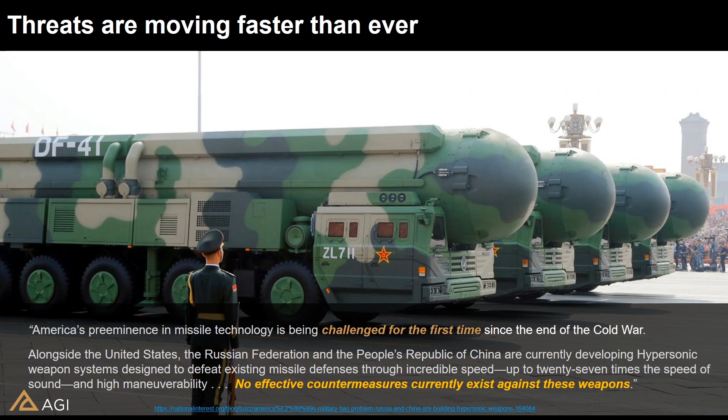We have to ensure that as new challenges arise, we are up to the task and that we do not get left behind. As the world continues to change and evolve, we have to understand that we need to go even faster than ever as well.

So we are seeing these new challenges and threats emerge, but we also have to talk about some of the challenges that we currently and have previously faced. Various studies across the industry have been conducted, and in particular, the Standish Group found that 82% of effort on software projects goes right into maintenance and testing.

Now this could be due to a number of reasons, such as having code that is stovepiped, one-off tools and software, or a piece of code that is repurposed for a use case entirely different than what it started out for. This has led some organizations to have mission-critical pieces of code that only a single individual knows how to run because they wrote it some 10-odd years ago.

Another issue is that a lot of programs or projects have initial requirements that don't fully capture the scope of the project, and changes had to have been made. I'm sure many of you are familiar with scope creep. Because of this, we aren't even getting a one-to-one increase in production when we get that increase in staff. Another study concluded that a 50% increase in staff is only leading to a 20% increase in production.

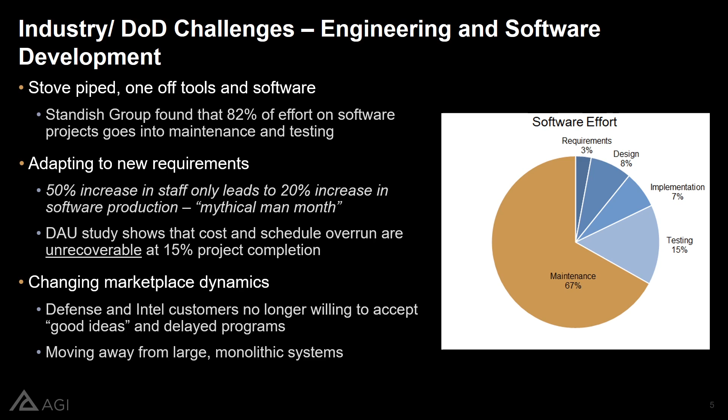Lastly, the marketplace is completely changing. Defense and intel customers aren't willing to accept good ideas if it costs a program delay to implement these ideas. Due to this, we all find ourselves at a very interesting time in our industry. However, we have and will always have new challenges to face, and like always, we will come up with a solution. But that raises the question of, what should a solution to these challenges look like?

Well, we've listened to what has been said across industry, and here's what we really came up with. A solution should include a limited set of open, highly capable tools that are tightly integrated across all phases of a program and even across different programs. This is important both for the continuity of highly interdependent programs, but also to minimize the ramp-up of personnel as they transition from program to program.

To that end, really, a solution must be open to custom data and leverage common data standards to integrate with tools like MBSE or even your proprietary models. This way, your engineers can focus on the secret sauce that makes your organizations unique, versus trying to maintain some old code or currently recreating a duplicate model that was already used for a different program or project, or etc.

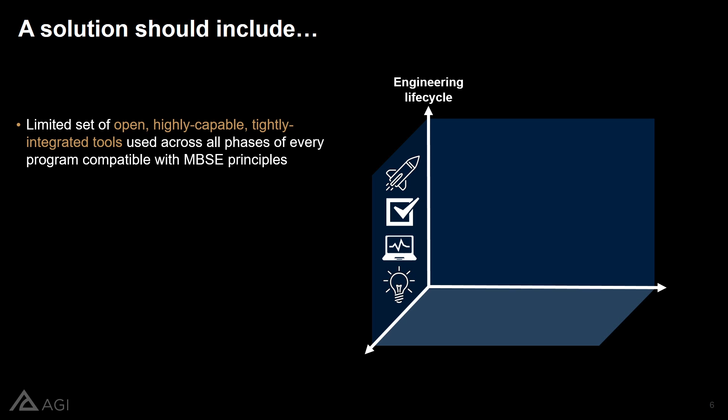Additionally, a solution should include a sophisticated analysis environment that can enable large-scale trade studies where design parameters can be evaluated against mission performance metrics from all levels of modeling. This can be at the system level, component level, and even campaign level of modeling.

Along with that, this analysis must rely on rapidly modeled, accurate dynamics of any platform performing the mission. It does not matter if it's modeling a friendly or adversarial entity, a spacecraft, an aircraft, or etc., using either simulated or even ingested real data.

And this is where collaboration becomes very, very critical. As your engineers, scientists, and specialists make changes in their own domain, those changes must seamlessly ripple through to the specialists in other domains, instead of having to schedule a meeting or email an individual on the other team informing them of the update and making sure they receive it in a timely manner.

For example, if your communications team makes a change to the antenna size, how does that change affect the link to the aircraft? Will this introduce more dropouts? These are the kinds of changes in parameters that you would want to seamlessly flow through your entire engineering lifecycle to see how, at the end of the day, that mission is impacted by your antenna change.

Finally, the whole solution must be validated and trusted across a wide variety of complex problems. This will help keep the focus on addressing new challenges and not building and accrediting new tools every time. Along with this, the solution must be well documented and supported so your engineers can learn and get up to speed without bogging down your own highly valued subject matter experts.

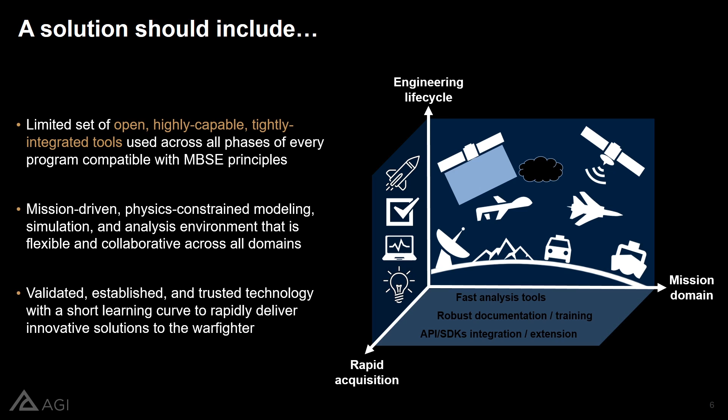So this basically brings us to the concept of digital mission engineering and even digital mission operations. Digital mission engineering is the use of computer-based modeling, simulation, and analysis tools to incorporate the operational environment and evaluate mission outcomes at every single phase of the engineering lifecycle. Not just in design, not just in testing, not just in operations.

When programs are created, they are meant to meet a need, a gap, a requirement that will help achieve the desired mission objective. Programs aren't necessarily created just to create the coolest new aircraft or the coolest new tracking system, just because we can, as cool as that is. There's an underlying purpose that guides every task, every assignment, and every decision, and it's the mission. It always comes down to evaluating the mission outcomes.

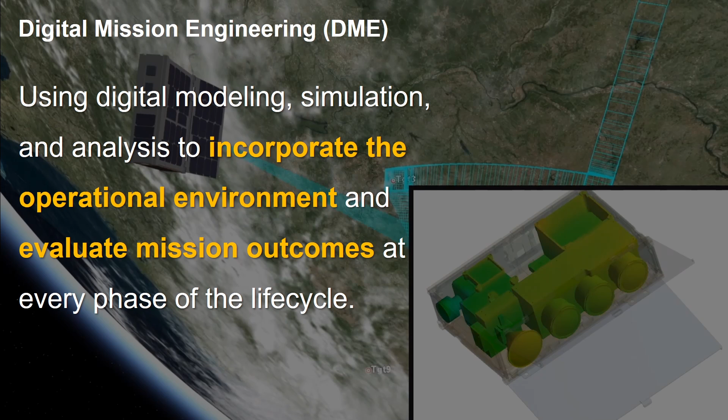So if we keep that in mind and take a bird's eye view of digital mission engineering, even though the mission is of utmost importance, DME is comprised of seamlessly integrating the mission models with the system models, subsystem models, and even component-level models into one physics-based construct. To really do this successfully at each level, we create what's known as a digital twin.

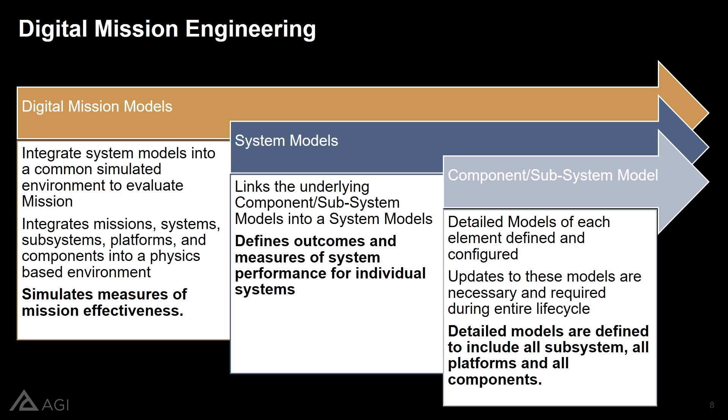A digital twin is a digital representation of our component, system, or even systems of systems. The purpose here is to really evaluate mission effectiveness while at the same time component effectiveness, all in a single user domain. Remember, it's about keeping this as seamless as possible.

So now to reframe the question of why now, or why DME is important now, based on everything we've talked about, there are really two big reasons. There isn't a tolerance anymore for lengthy program timelines, and the complexity level of these programs is increasing dramatically, which points back to an acceleration of national security threats. So these programs are not only having shorter timelines, but the complexity to achieve the results is so much more advanced.

We can't really have an incremental change here and there to update our current methodologies. We need to implement a revolutionary improvement approach. And it's not just us who think this way.

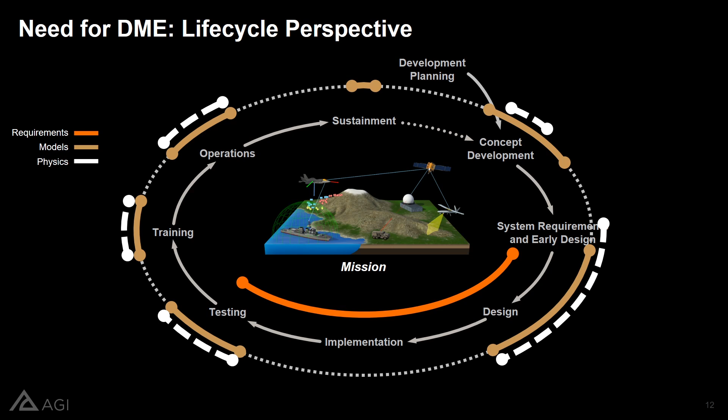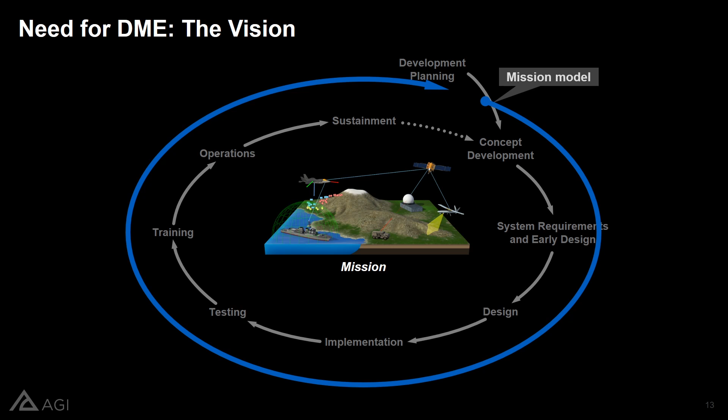What we have here is this vision to achieve better decisions sooner. Process changes and the right tools are important. What we see here in this vision is, unlike the previous life cycle, there aren't going to be any broken lines as we frequently see today. The goal is to maintain a persistent model from the concept through sustainment so that there is traceability back to the mission outcomes. Always about the mission, remember that.

And these models can be descriptive models, calculation analytical models, behavioral models, or really anything that we discussed in our definition of DME. The goal here is to have a persistent model that brings as much high-fidelity modeling and simulation as far forward, or to the left of the influence effectiveness curve, as possible.

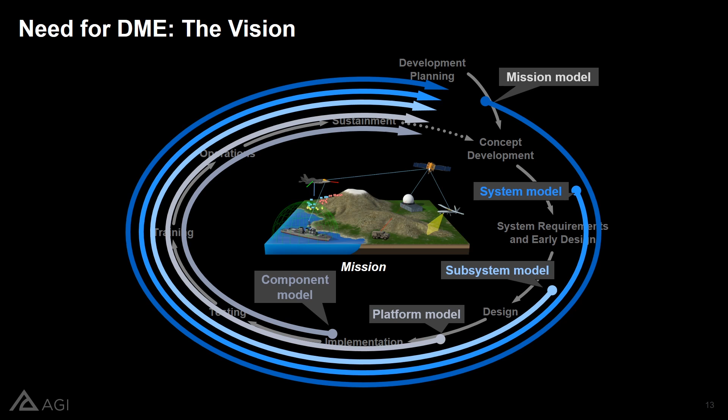So we need to make sure that all of these seamless models are always communicating and connected to that multi-domain physics environment to really achieve those physics outcomes. Having that multi-domain physics environment or ecosystem is very important to ensure that it will help us really knit through the fabric of the digital thread through the life cycle.

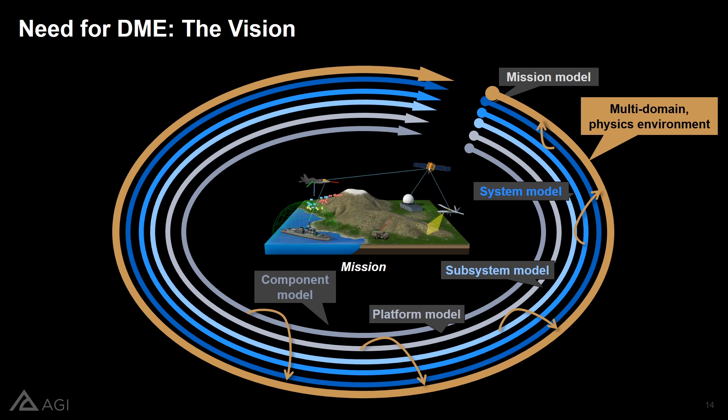So far, at this point, what we've discussed is an overview of DME and why it's very important right now. And now, for a moment, I really want to move on and show you what our vision of DME looks like and how AGI and STK really fit in and play a fundamental role in all of that as well.

So as we jump into the Hypersonic example, you will notice that almost every stage is constructed or has a piece that is analyzed using STK. So before we really jump in, it makes sense to provide some context for what STK really is.

Many folks know us for satellite visualization, but AGI STK is much, much more than that. We are a multi-domain type of tool that can analyze all land, sea, air, and space platforms, as well as subsystems going from EOIR sensors, communications and radar platforms, propulsion systems, etc.

And more impactfully, we fuse all of these disparate or various elements into a single common environment that's physics-based, where we can analyze the interactions that are taking place between the component level models, the subsystem level models, and system of systems level models. Using STK, we also can extract over 40,000 performance metrics to ensure that you are getting exactly the information and data you need to ensure mission success.

Along with that, we know that a lot of folks, like we were saying before, have their own secret sauce, and STK has flexible form factors and APIs to really allow you to bring in your own data-driven custom models that we can then use to integrate with the current models that are built within STK.

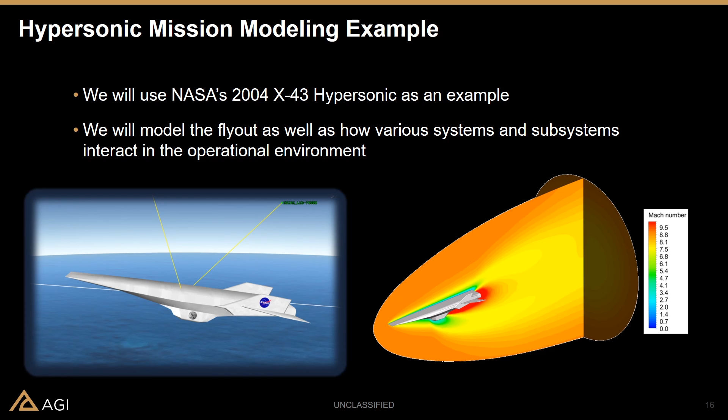All right, so now we're just going to jump into the hypersonic mission modeling example with everything that we've established about STK and digital mission engineering. For our example, we will use NASA's 2004 X-43 hypersonic glider flight. And with this, we will model the flyout as well as how the various systems and subsystems will interact with the X-43 in the operational environment.

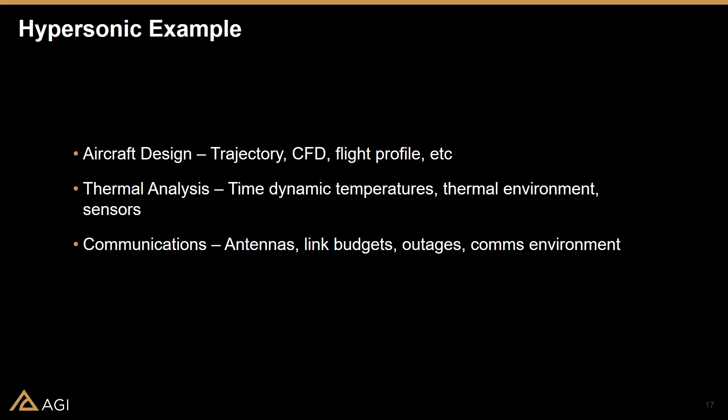So, just to highlight what was in the agenda, we're going to break this up into 3 portions: the aircraft design, the thermal analysis, and the communications. Now, of course, this may not encompass every part of the hypersonic engineering lifecycle, but for our time here today, we felt that this will be good enough to really get a better understanding of how digital mission engineering can raise the efficiency and effectiveness of your engineering analyses. So, we're going to start off first with aircraft design and really focus on the trajectory, CFD, flight profile portion of it.

So going into the flight capabilities, with STK Aviator we have the ability to define realistic models and performance characteristics for highly accurate time-based aircraft route analysis. Within the module, the user can define the aircraft model, the performance model, and flight sites, as well as procedures to fully outline the aircraft's mission. In that aircraft model, we can define the physical characteristics of the aircraft, as well as the modes of flight that define how the aircraft flies in any given situation. Not every single maneuver will have the same type of control surfaces deployed, etc., and all of that can be taken into account.

Performance models are used to define the behavior of this aircraft, so by specifying the performance in every phase of the mission, we can change the manner in which the aircraft is performing the mission based on the priorities of the mission. This can include modeling the takeoff, climbing, cruising, acceleration, descent, and landing, with parameters such as the bank angle, turn radius, roll rate, as well as various aerodynamics and propulsion of the aircraft. We also can model the fuel and the fuel distribution and some of the operational environment, because a flight won't always be in smooth, calm air. You can model wind effects to see how your fuel consumption and other parameters are being impacted.

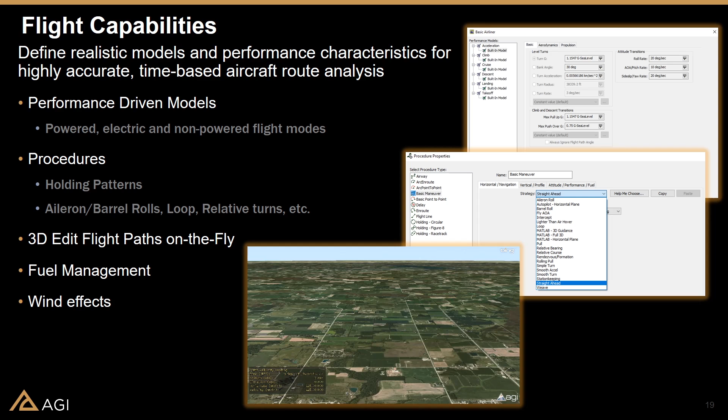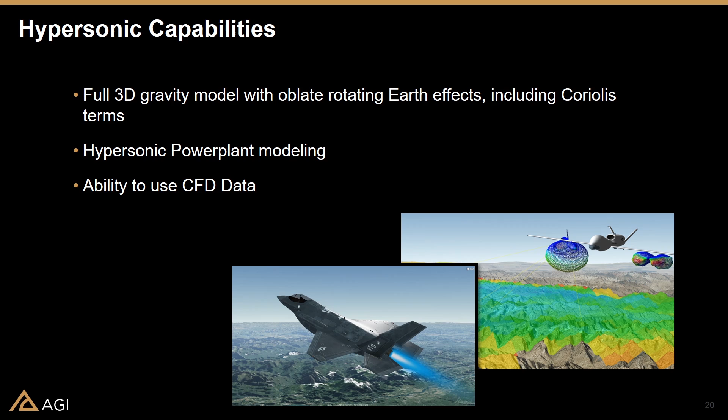Along with that, at a very high level, we also have hypersonic capabilities right within Aviator. Aviator has a full 3D gravity model with oblate rotating Earth effects, including some Coriolis terms, and we also give the ability to model some hypersonic power plants. Aviator can also ingest CFD data to ensure that your aircraft models are even more accurate than what the tool can predict, especially with these new hypersonic vehicles being tested in CFD environments or even wind tunnels. From these, you can generate a flight envelope that gives a realistic representation of how your aircraft will perform under various conditions.

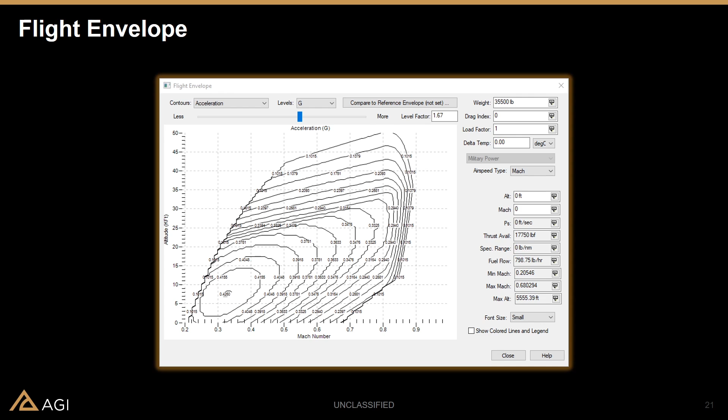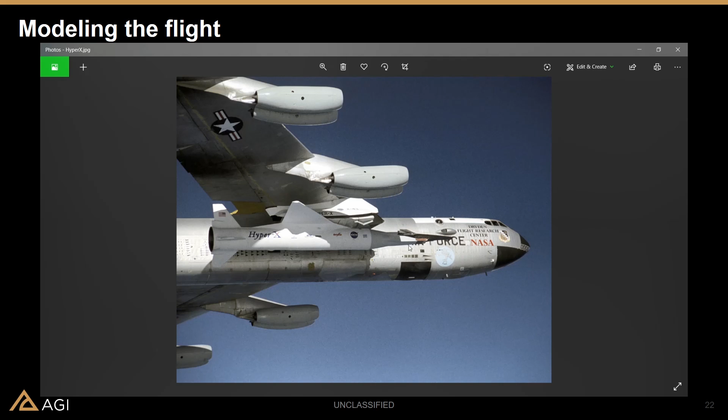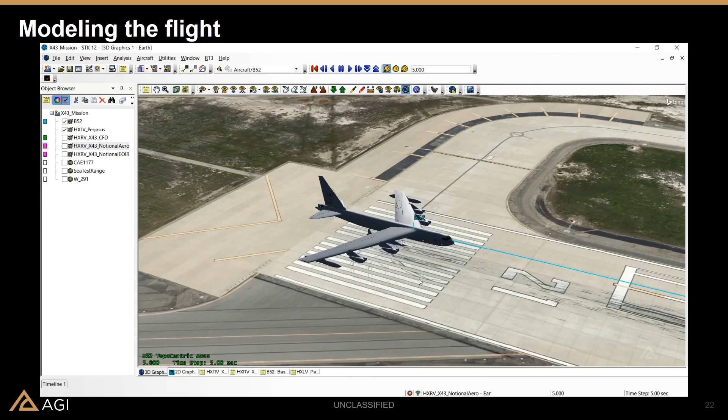So with all of this in mind, with STK Aviator, from both the hypersonic side and the fixed-wing aircraft side, we were able to model the X-43 hypersonic vehicle's flight within STK, and in particular the entire system of systems of aircraft used for the X-43 flight. As you can see, we're about to take off from a runway in STK, and here we have an image of the B-52 that actually flew on the flight for the X-43. On the B-52, we have a Pegasus Stage 1 launch vehicle, renamed the HyperX launch vehicle, on the wing with an adapter, and the HyperX research vehicle, or X-43, on the nose. Within STK, we modeled all three: the B-52, the Pegasus launch vehicle, and the X-43 research vehicle, the actual hypersonic portion.

Here you can see it taking off from a runway, with our B-52 following a certain trajectory that we modeled. Luckily with Aviator, we don't have to explicitly write out every independent waypoint; we can model the B-52 in terms of simple procedures, such as taking off, flying to a waypoint, flying straight for a certain amount of time or distance, and then turning around to land.

Within this flight, we have the Pegasus launcher and the X-43 deploying and flying off. So here we can already see how the operational environment is allowing us to really combine these three systems together and see how they interact with one another in terms of when one has to deploy from the other and so forth. As well as that, you can see that with Aviator, we were able to take metrics of the B-52 that we got from various papers and model it right within the software.

So along with that, we can see here that after a certain amount of time that the B-52 flies, we were also able to model the launch vehicle that takes the X-43 up to altitude where it can go through its hypersonic gliding. And that's in this yellow line that we see on the screen here. So we can tell that for some moment in time, it is attached to the B-52 under its right wing, and then after a certain amount of time, it will then get deployed and launched off to get to a certain altitude of about 100,000 feet and a Mach of about Mach 10 for the hypersonic glider to deploy and go through its analysis.

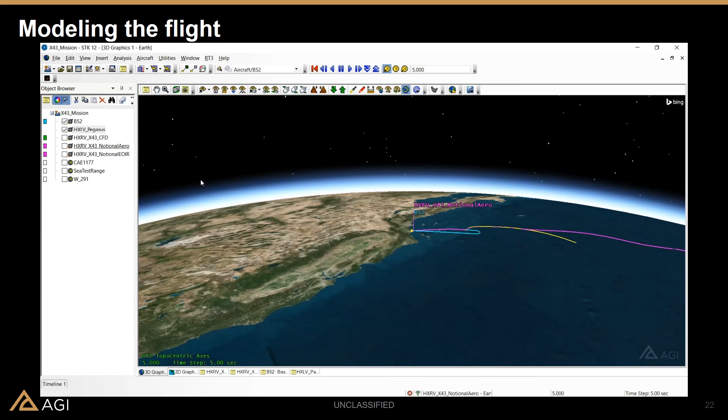But before it does that, we have here in magenta the X-43 that was able to be deployed. So as you can see here, working within the STK operational environment, we're able to show all three take off, and we're also able to show this X-43 deploying and get certain metrics from it.

If we were to take a look at the X-43 here, you could see that really due to just the nature and the time that this test took place, the hypersonic portion here is only for about 10 to 11 seconds. And the reason for that is this is technically a hypersonic glider, meaning it can't really achieve that hypersonic speed, but it can maintain it with the fuel it has on board. So before this hypersonic phase, it ejects from the Pegasus, which brought it to speed, and now here we're observing how the hypersonic vehicle behaves with the fuel it has on board and the metrics that we were able to ingest into the software.

If you can look at the top left, you'll see that the initial aircraft setup is X-43 notional, meaning that we took data that we got from public NASA papers about the X-43 and ingested that into the Aviator, which was able to make a flight profile based on those metrics. This is what led us to get the flight trajectory that we do, and also points out why the aircraft lands where it does in terms of the physics that are being calculated.

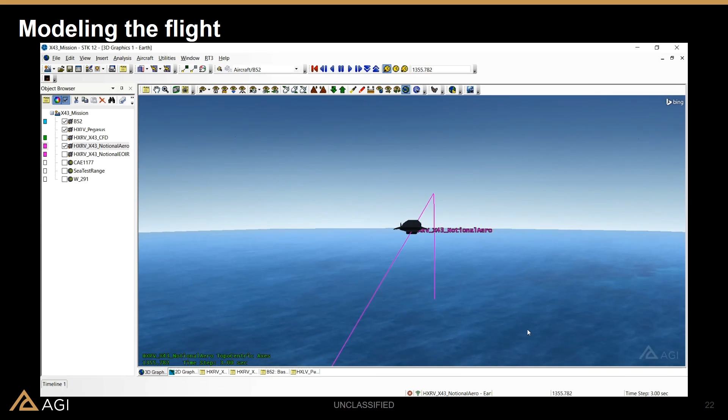And here we can see we have the X-43 just after it's deployed going along its route, and you can see here it has about a 10-degree angle of attack, and we're just going to let it propagate. One thing to note is we're going to see this go through a physical motion as it's trying to maintain its angle of attack, known as a phugoid motion, as you can see it kind of going up and down. And we did not tell the aircraft to necessarily do this. We told it to maintain an angle of attack, and it essentially is now using the physics built into STK to accurately model a phugoid motion.

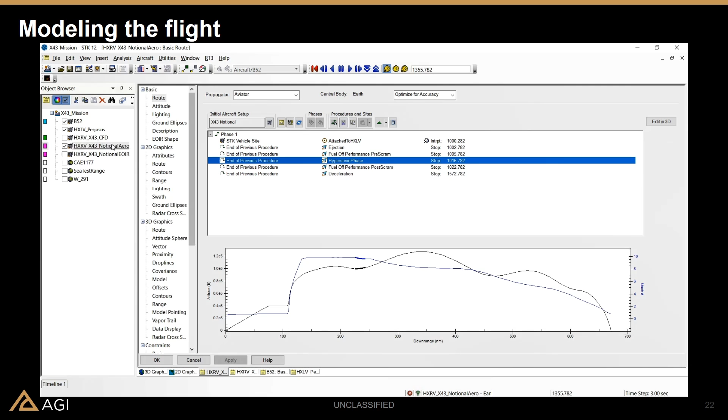And here you can see that now this X-43 is landing somewhere in the ocean. And the whole mission use case here is the engineers and analysts want to model how well this hypersonic vehicle can be detected and a general idea of where it lands for recovery. Of course, if you are familiar with the real story, I don't believe recovery occurred in all the flights, and we may have lost some just due to them hitting the ocean.

But anyways, with this X-43 notional aircraft here, you can see that we have some of the varying metrics to get from the software. We did mention that there's over 40,000 metrics, but here is just a few of them that are dealing with flight profile by time of the hypersonic vehicle.

And here you can see that we're able to get metrics such as downrange, vertical speed, altitude, fuel consumed, and so forth. And of course, right at the start of the mission, the X-43 is pretty much on the launch vehicle, so the fuel isn't consumed, but as we go forward, we can see it is. So here we have just a general modeling of the hypersonic aircraft trajectory portion only.

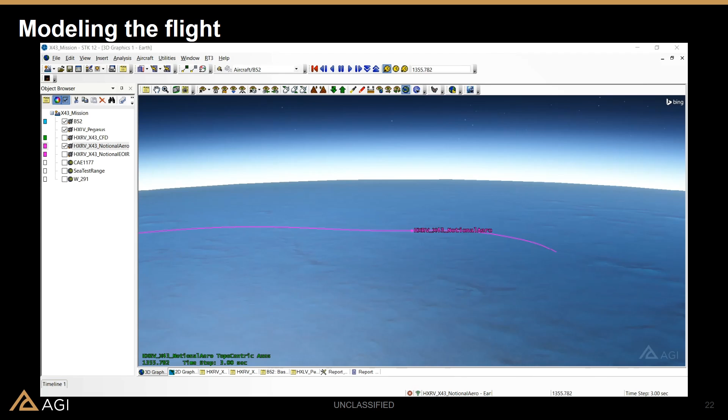And one thing to note is with STK, we can up the fidelity as well. I did mention with Aviator that you can use CFD data to once again increase the fidelity. Unfortunately, we didn't really have the most accurate metrics that we got from the NASA papers about the lift and drag coefficients, so that is why this HyperX launch vehicle is known as the notional aero. But what we did do is with another tool that is very, very helpful for digital mission engineering is we used ANSYS's Fluent tool for CFD modeling.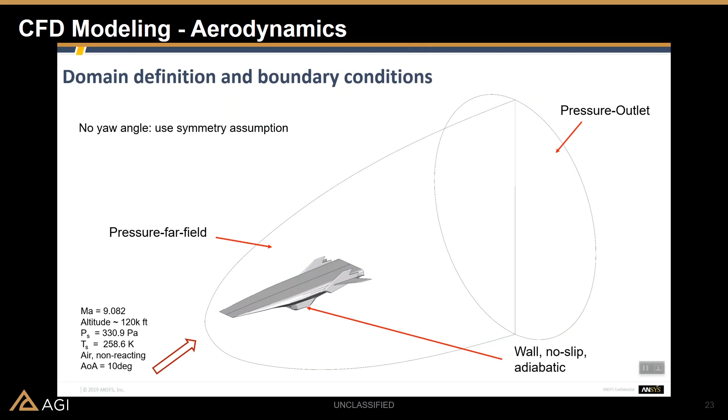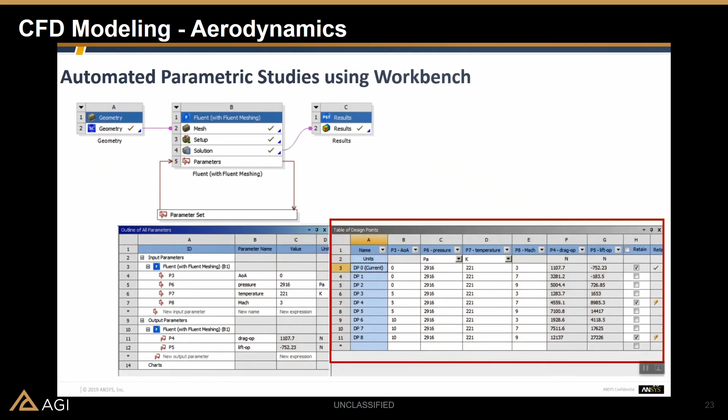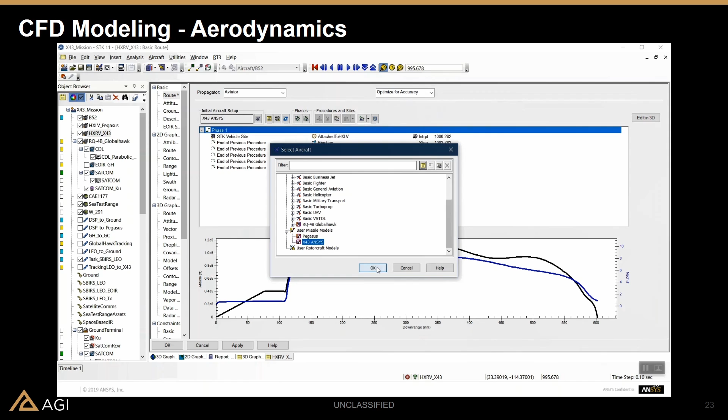And what we did is we placed in the hypersonic vehicle to get a more accurate representation at various speeds, altitudes, and angles of attack to get a more accurate representation of lift coefficient and drag coefficients. From this, we were able to import some of this data right into STK to give a better idea of how exactly this aircraft should behave versus the notional assumptions that we got from using the information of its geometry and power plants from the NASA papers.

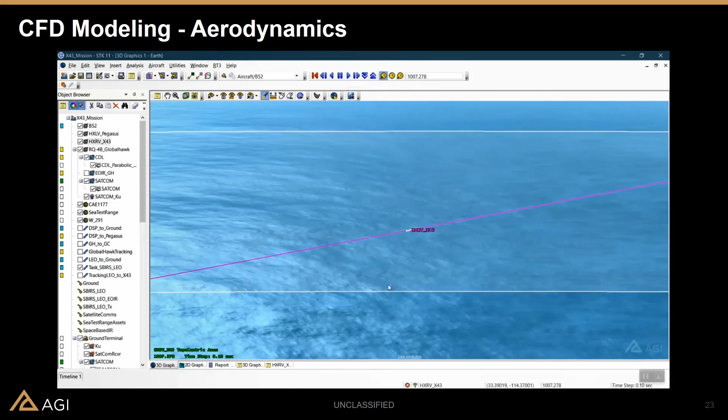So here we have a little bit more of a higher fidelity analyses that's going into the X-43's trajectory and flight profile, as we got it from a high fidelity component level analyses done through ANSYS with CFD. And just to kind of go forward here and show you the difference between the two, currently here we're back in our environment where we saw we had our hypersonic vehicle. We just hid the visuals of the B-52 and the Pegasus launch vehicle. But what we're going to do is compare the trajectories between the CFD version of the X-43 versus the notional that we got from the generic or the generalized papers.

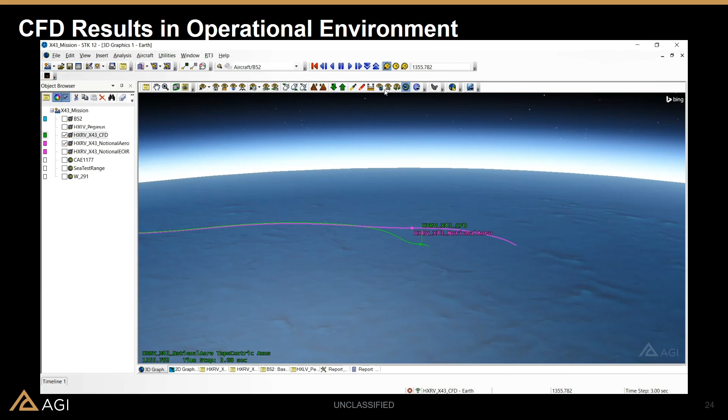And here we can see that we told the CFD aircraft here to follow the exact same procedures in terms of deploying at the same time and so forth. But just due to the higher fidelity of metrics, we're able to see a disparity or a generally large difference between where the two vehicles say that they are landing. Now, in our use case, this could become very important in where some boats have to be placed in order to recover this vehicle. It's about a 92-kilometer difference. So we have to make sure that we are placing entities in that area or entities to track this in that area so that we ensure success in recovery and also success in testing various subsystems or systems that we need to test.

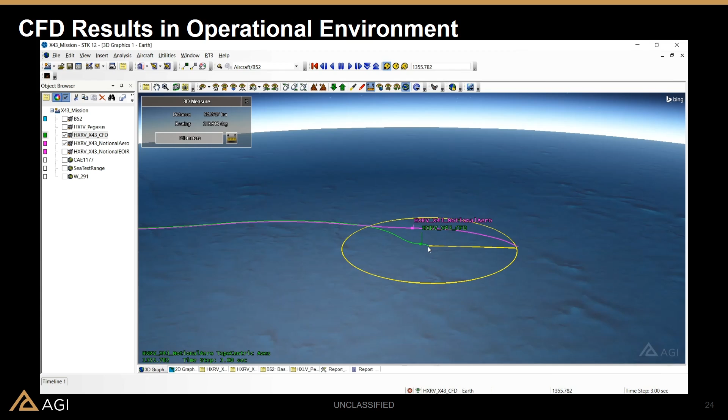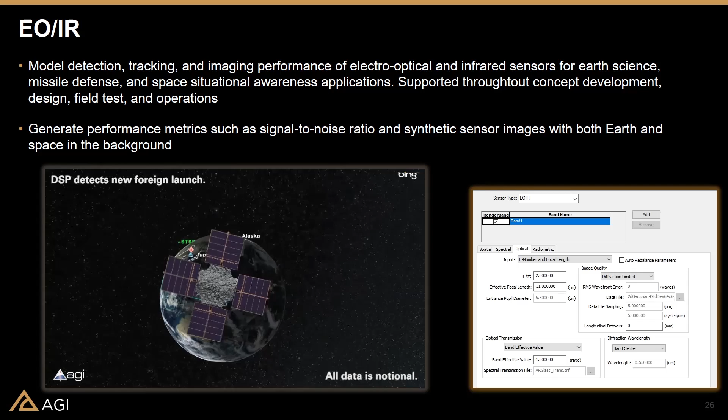So now we're going to move on and start talking about the thermal analyses. This includes things such as time dynamic temperatures, thermal environment, and the different sensors that we have to model in order to properly make sure that we can detect our hypersonic vehicle just based on its thermal signatures. For this, we will be using EOIR, still out of STK. What EOIR allows us to do is model detection, tracking, and imaging performance of EOIR or electro-optical and infrared sensors for various different applications, such as earth science, missile defense, and space situational awareness applications. So this is pretty much supported through the whole concept development, design, field test, and operations.

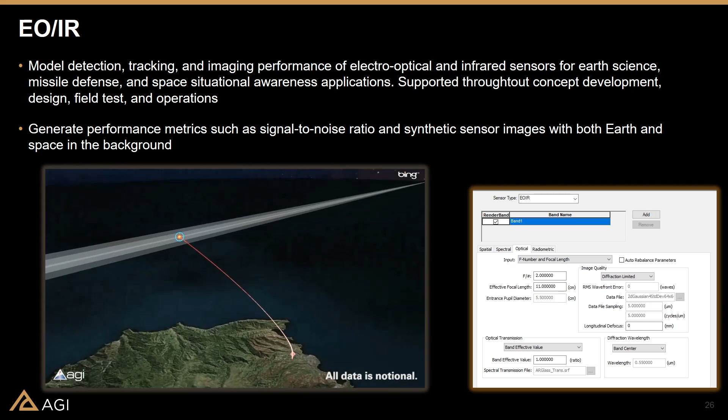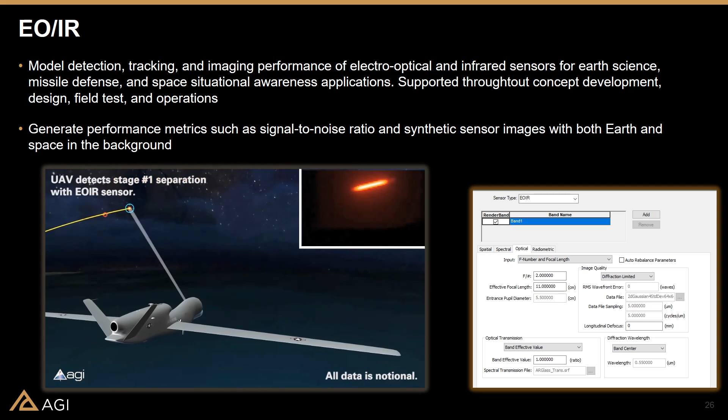And with EOIR, you have the ability to generate some technical metrics, such as signal-to-noise ratio, but not just data in the form of reports. You can also generate synthetic scenes or synthetic sensor images that a realistic EOIR platform would be generating. But it's all simulated, so you still can go through your parametric analyses, but still generate lots and lots of synthetic scenes and data to really make sure that you are getting the proper results.

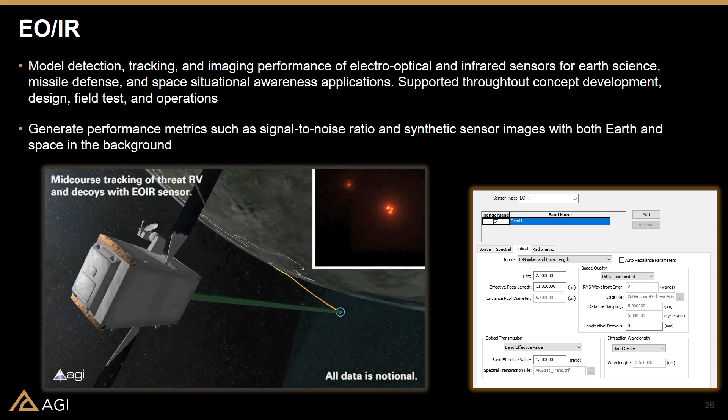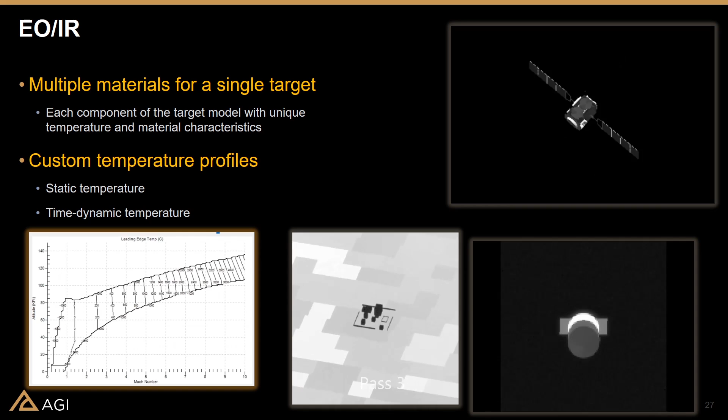So with EOIR, you're not necessarily just going to be looking at a static temperature, especially with hypersonic vehicles. A certain region, like the leading edge of a hypersonic vehicle, may have its temperature change drastically over time. So EOIR gives you the ability to really model those proper types of temperature disparities that occur over time in the software to once again really let you take a look at that whole mission level of performance characteristics.

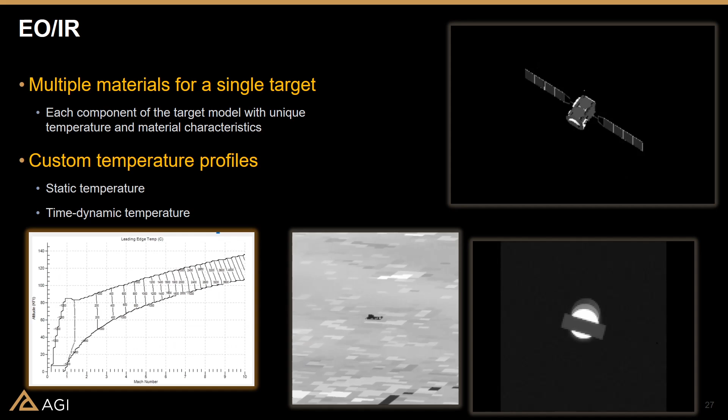Yes, we know that our sensor can see the vehicle at its hottest, but depending on where our certain sensors are placed, are we able to even detect the vehicle when it is flying at its lowest temperature? If not, can we still detect the vehicle, right? These are the kinds of questions that we're hoping to answer.

But along with that, there is more to the operational environment. You may not have clear sunny weather every single day. In our hypersonic case, it may not be a completely clear day either. There may be some clouds in the way or so forth. But luckily, with EOIR, we have the ability to ingest cloud modeling with a thin layer approach, as well as supporting inputs for different time dynamic layers and cloud characteristics that go through percent cloud cover, the temperature, emissivity, and radiance. Remember, we always are focused on the mission, and random bursts of bad weather are part of the operational environment.

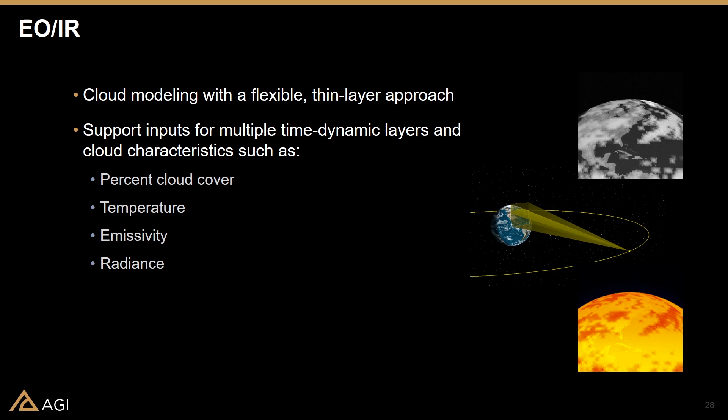So just going back to our example with STK and really taking a look at that thermal environment, we're seeing here a representation of the hypersonic flight, but with more entities added in. You can almost picture that the folks in charge of the aircraft now passed it off to the thermal group, who had some information about where certain satellite platforms and other aircraft platforms should go that would be containing some of these EOIR sensors.

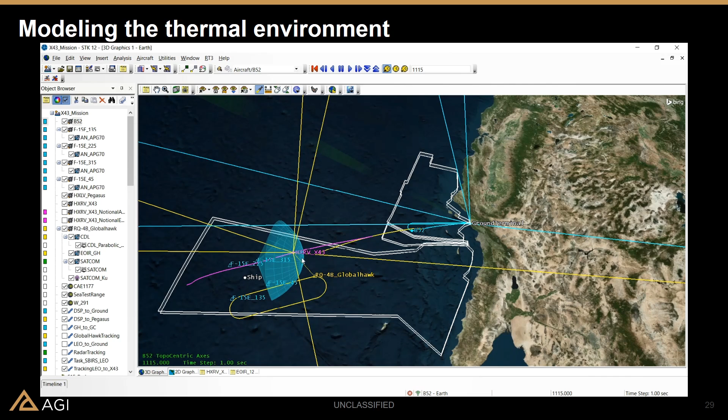So for example, we still can see our initial route here with that blue B-52, the yellow Pegasus, and then the magenta HyperX research vehicle. But around it, we can see that we have a whole bunch of various entities, such as some F-15Es, an RQ-4B Global Hawk, as well as a bunch of UAVs. They're all communicating to a ground terminal, but they're also doing observations of the hypersonic vehicle.

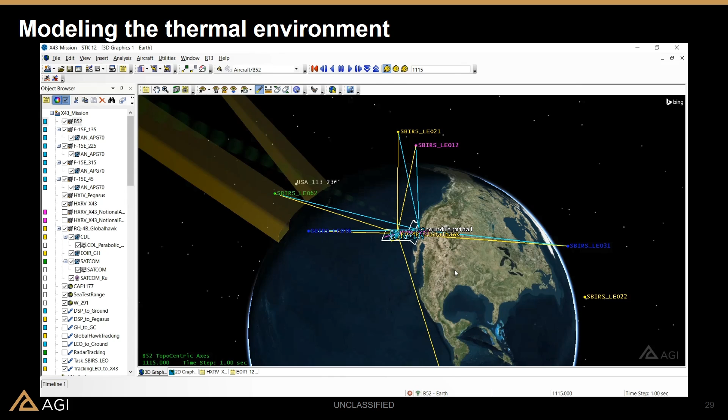The hypersonic vehicle's thermal tracking lines, or just guidelines if you will, are represented by yellow, while the communication lines are represented by cyan. So since we're modeling the thermal environment, we're going to take a closer look at what the yellow lines mean and how some of the spacecraft in our operational environment are interpreting our hypersonic vehicle. So we're going to take a look at LEO number 12 here, okay? And we're going to basically look at an EOIR camera that's along this yellow line. And this EOIR camera has a few metrics that have been programmed in it to help us generate a synthetic scene of a certain parameter.

So what we're going to do is now just go into the properties of the EOIR sensor right here, and we can see we have initially the spatial parameters set. For example, the field of view is only 0.002 degrees in the horizontal and vertical half angle directions, with about a pixel resolution of 13, and we have all these other parameters that we can adjust. We only put in one frequency band here, but as you can see, we can add things such as motion blur and any types of jitter, to really, once again, make a system in STK that's a digital twin, so it must be accurately represented.

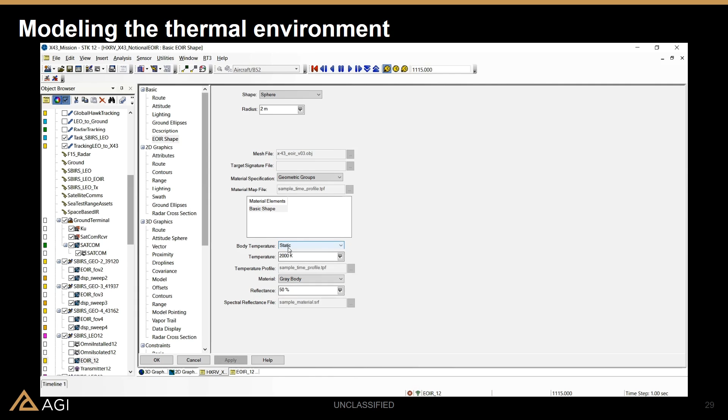With all of this running, we were looking at the sensor side, but we also have to take a look at the X-43's materials side. We have the ability to set various shapes that can be as coarse or as high fidelity as we like. You can see here we have a custom mesh option to ingest 3D models, but right now we're just going to keep it at that coarse level, with a radius of 2 meters, an average temperature of 2000 Kelvin, and just a gray body material. You can almost think of this as the first pass to see if our EOIR sensors are configured properly in the first place to detect just a generic sphere. From there, that's where we can start really upping the fidelity.

So if we were to take a look, taking into account the sensor parameters, the vehicle thermal parameters, as well as the atmospheric and environmental parameters, which do include things like the aerosol level, the cloud levels that we were discussing, and things like taking into account a MODTRAN atmosphere, we were able to generate some notional results. And the reason I say notional is because remember that EOIR shape was simply a sphere.

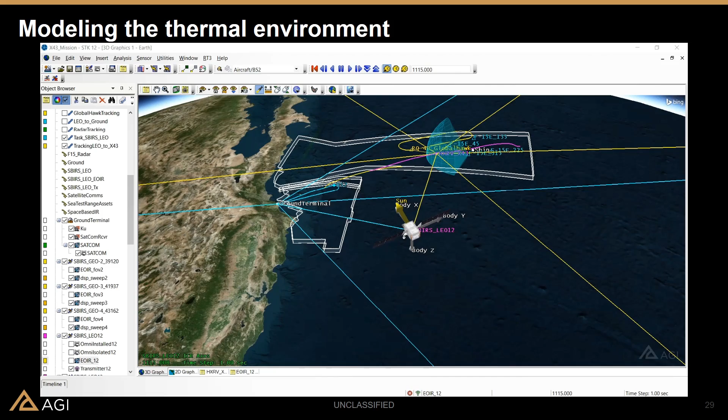But here we can see that we're getting some type of notional result that is basically letting us, from that same satellite, know that indeed, based on our parameters in this run or this use case, we are able to see some type of signature from the spacecraft.

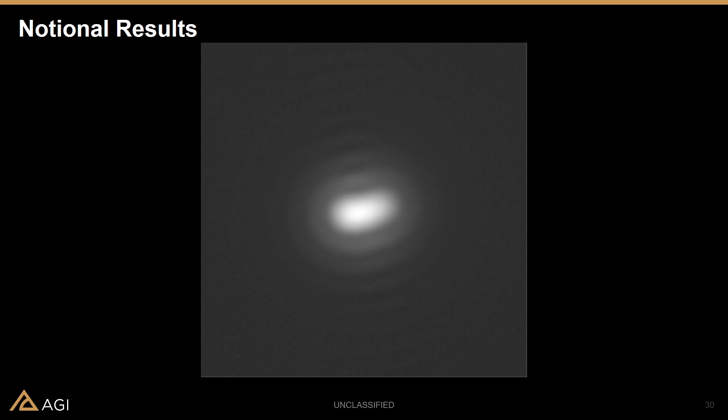So now maybe the next step for you from that thermal environment is to say, well, within STK, within our operational, multi-domain physics environment, how can I up the fidelity? How can I start bringing in more time dynamic thermal parameters so that I can more accurately analyze how well my systems can detect it? And the answer is, well, we're going to use another tool that's out of our DME infrastructure, which in our case is once again using ANSYS and the CFD modeling to get a better picture of the thermal environment.

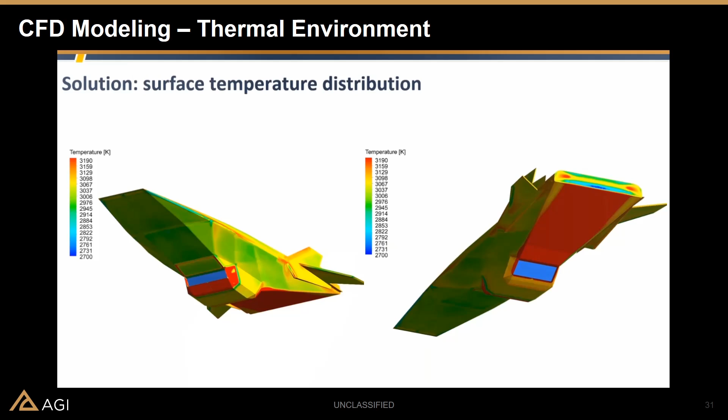So once again, while running a hypersonic vehicle through CFD, we were not only able to get various lift and drag parameters, but we were also able to connect to their thermal capabilities and get out a surface temperature distribution as this vehicle is flying out. So now in our use case, we still did make some assumptions, and one of them is that we only modeled the thermal temperatures of the hypersonic vehicle and not any of the plumes. Not saying that we cannot do that, we simply didn't for this use case. But that, of course, is that very next step of fidelity.

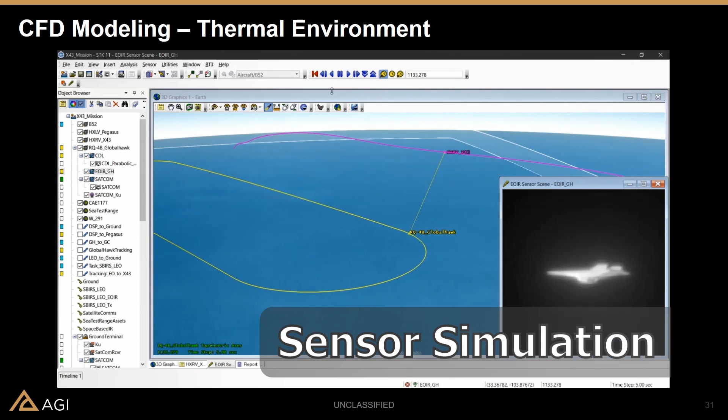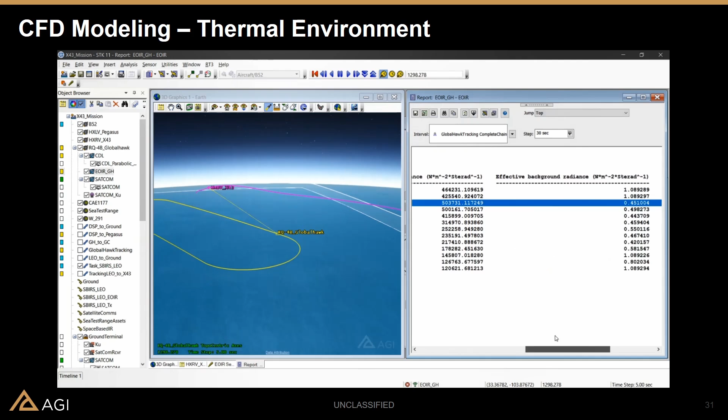So along with that, we did show a synthetic scene from the satellite side, but once we upped the fidelity, we just wanted to see how good of a picture we could get. So we also ran some sensor simulations from the drone that was very close by. And of course, the plume is not modeled here, but you can see that we're able to generate a synthetic scene of the X-43. So that synthetic scene is based on some of the thermal parameters that we were able to ingest in from ANSYS. But once again, it's still in that same operational environment as was that idealized thermal sphere. From there, of course, we can get these various detailed reports out of the software. So it makes it for a very ideal use case here.

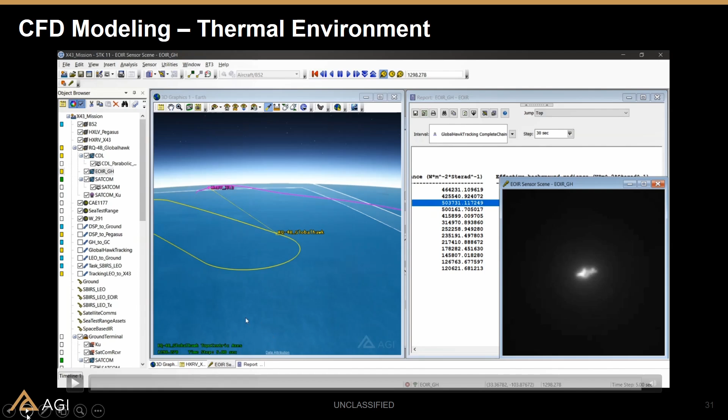And just to get a better picture of exactly what we're taking a look at, here's just the more accurate results. Of course, now it's in a different color format. In the previous slide, the color map was just in a grayscale, and here it's in a BGRY. But the reason I like showing this synthetic scene is because this is essentially a synthetic scene generated right out of EOIR that allows you to click on any of these pixels to get certain metrics out, such as the spectral radiance, the in-band radiance, as well as what material it is and the temperature at the time.

So you can essentially get all of these synthetic scenes generated and make a video that you can then compare to a real-world example to see how close it is to reality. And from this, we're now able to get a better idea of if our thermal sensors have the ability to detect, identify, and track this platform based on the certain assumptions we made and based on the parameters of our sensors. So from here, if we were to look in that whole engineering life cycle, since we're trying to find out where the X-43 will land, we now have a better idea of where it currently is in its flight because we have our EOIR sensors able to track it.

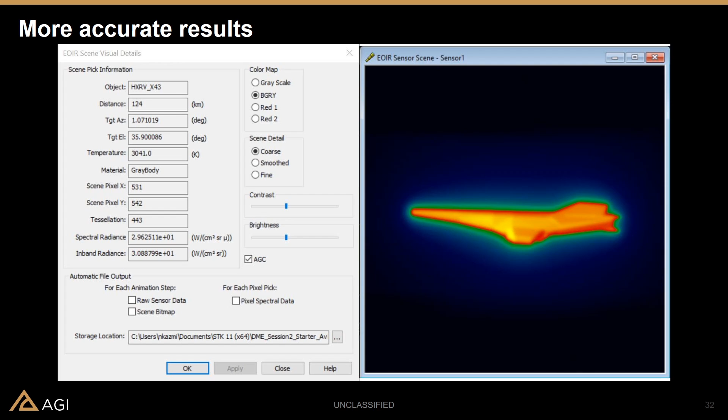Now, with these satellites and these UAVs that are tracking it, we need to make sure that we can pass that data or that information to the proper folks so that we can coordinate a recovery or a reconnaissance of such a vehicle. And to do that, we're going to be taking a look at the communications portion.

With communications, you have the ability to model things such as antennas, link budgets, outages, and really the whole comms environment. Now, this can go all the way from using just various antenna types that are found right within STK, such as a parabolic, a phased array, a Gaussian antenna, all the way up to any custom, or once again, back to that secret sauce, type of antennas that your organization may have and want to model within the tool. From there, and just like with EOIR, you can still get out very extensive performance criteria, such as loss, Doppler, carrier to noise, Eb/No, bit error rate, and so forth, while still taking into account the rest of the RF environment.

Like we were saying for EOIR, if it is a cloudy day, it may also mean it's a rainy day. There may be some rain or fog getting in the way of your comm analysis that could cause enough interference that this mission has certain areas overlooked, which need to be gone back to the drawing board to fix.

Along with that, we know that the operational environment doesn't always just mean the atmosphere. It could be some other passive players. We saw here that we were modeling EOIR sensors on satellites in a LEO regime that also had some communication parameters on them. Well, the LEO regime is pretty crowded as it is, and it will get even more crowded with all the large constellations coming out, meaning there will be interference issues we have to account for. So luckily, through the use of comms, we can also account for certain shortcomings that are due to some passive interference, or in other use cases, some active malicious jamming that is occurring.

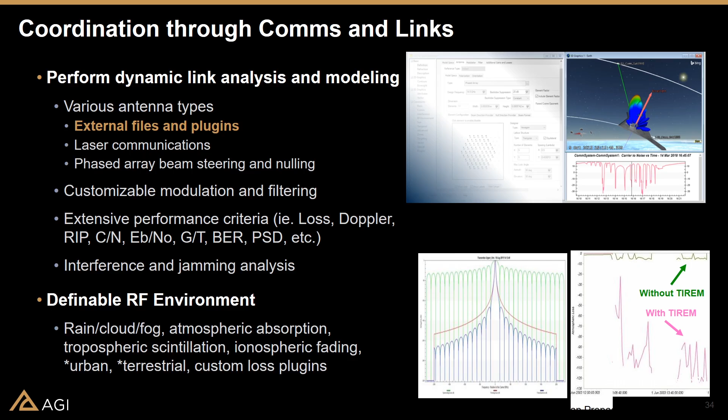Also, let's take a quick moment to talk about modeling the hypersonic plasma layer. We know this is a very important facet of analysis that needs to be conducted with hypersonic vehicles. In our use case, we've really been focusing on modeling the communications network for the various tracking entities. With that being said, we currently do have some methods to model the losses at a mission level, in the form of losses introduced to your link through native geometric constraints, or even using user-extensible comm loss plugins that you can program in to introduce time-dynamic loss due to the plasma layer.

Along with that, we are currently working with our partners on a standard model integration, which we hope to see in future releases to make this type of analysis more seamless within STK. But like I said, for our use case we mainly focused on the communication network, but this could be another piece of analysis that gets added in to see how much the degradations from the hypersonic plasma layer affect any communications to the X-43.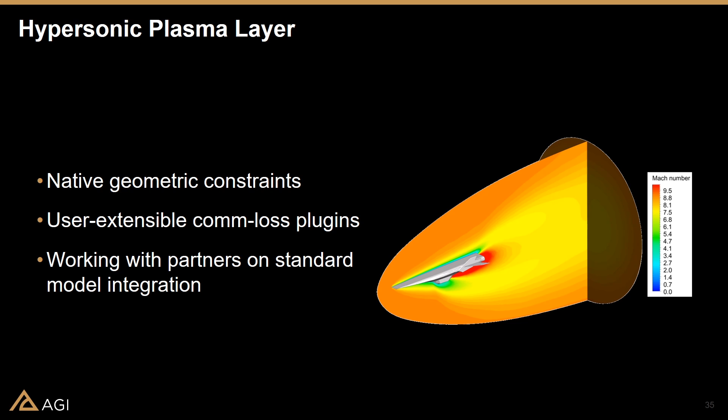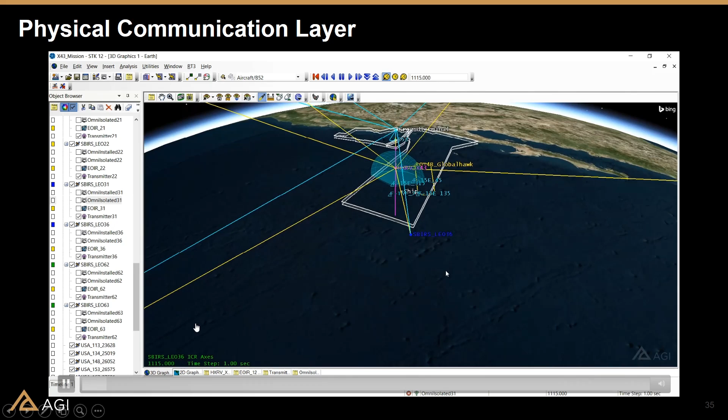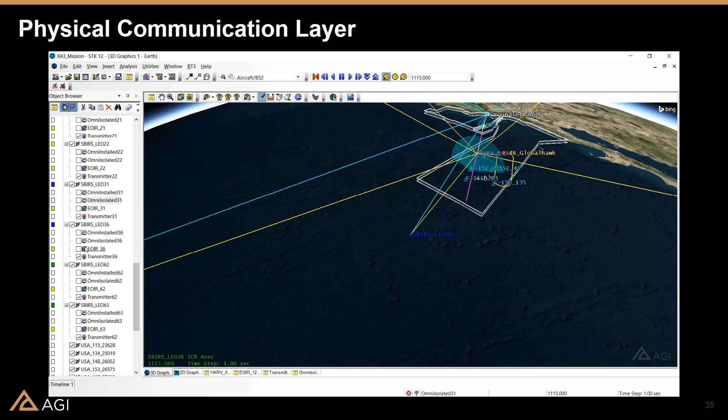So for example, going back to the same use case, this time we're going to be focusing more on the blue lines. If the yellow lines represented all the different satellites and platforms that have EOIR payloads on them, now these blue lines represent all of the spacecraft and other platforms that have a communication payload on them, that are able to coordinate some type of communication back to the main base here, or the home terminal.

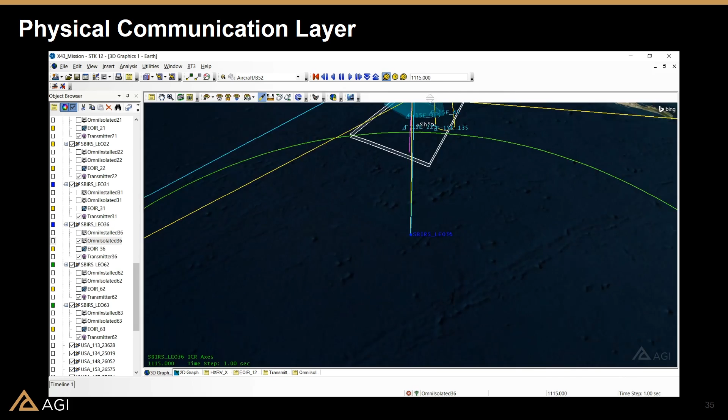So for example, we're using just an omnidirectional 2.2 gigahertz antenna. It's a very generic pattern that we made, and we're able to get very idealized results with this. So this is not the end of the world - it's just like with EOIR, showing how we start from coarse and will eventually go all the way up to a higher fidelity.

But even with the coarse level fidelity antenna that we start with, we still can get out those high level results to see if we're in the ballpark range of what we expected. And if not, maybe that gives a great indicator before even upping the fidelity and calculation time of other issues that may need to be mitigated or fixed. This allows us to just get that general picture, and if we were satisfied with the results here, we can then move to up the fidelity.

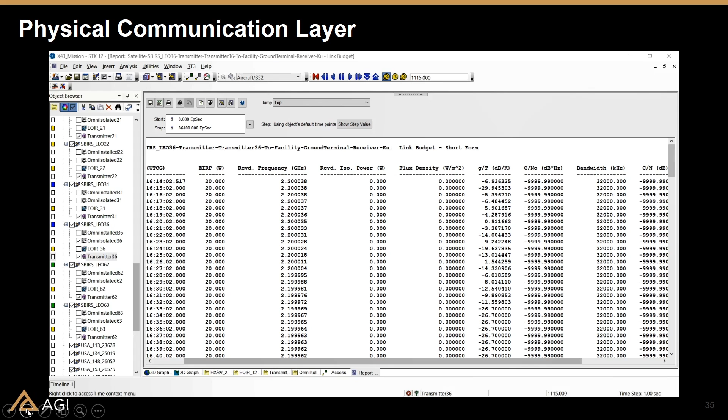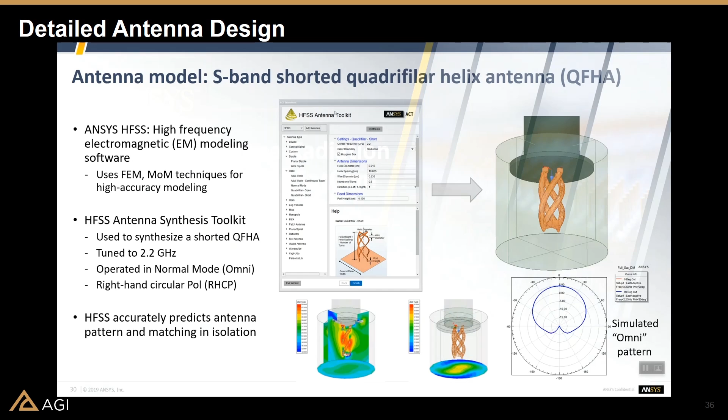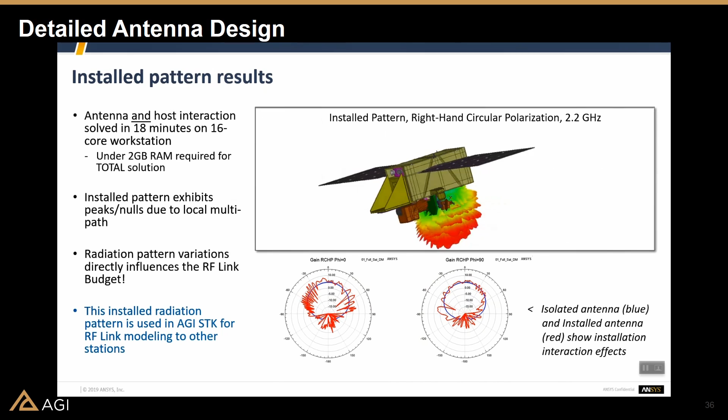Once again, just like for the thermal characteristics or even the computational fluid dynamics - in our case we've just been using ANSYS for the other two fields, and we did the same with the antenna design. In this case, we used HFSS, and what this allowed us to do is to take our 2.2 gigahertz omnidirectional pattern and run it through some type of co-site analysis to see how the signal and energy is being interfered with just by the satellite body itself.

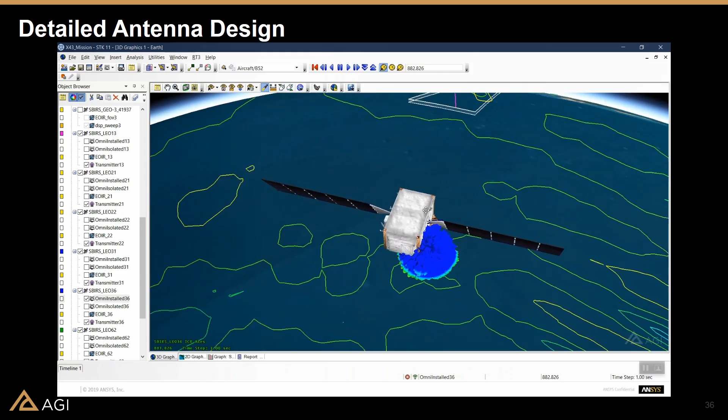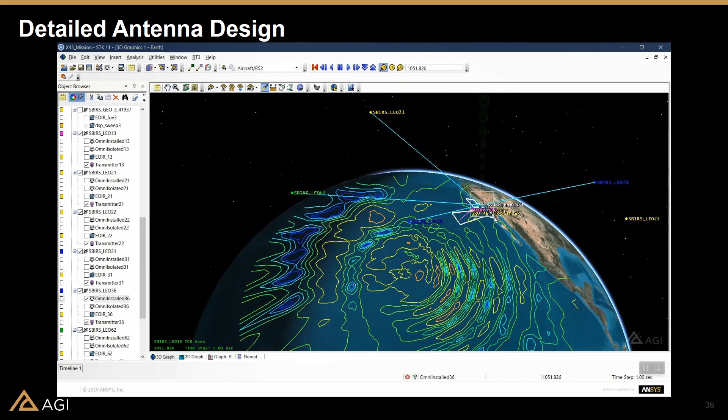And we were able to then generate a brand new pattern that is of higher fidelity than the one we just previously saw. In our case, you're going to get a contour that looks much more jagged, as you see here, not just clearly defined. Its gain contour pattern on the ground is now a much more realistic representation of what would actually be seen. It wouldn't just be a single circle that's very neat; it would be very much dependent on certain aspects that give us this contour on the ground in the way we see it. Because of this, we may get more unexpected dropouts in certain areas and dips that we didn't account for with just that idealized version.

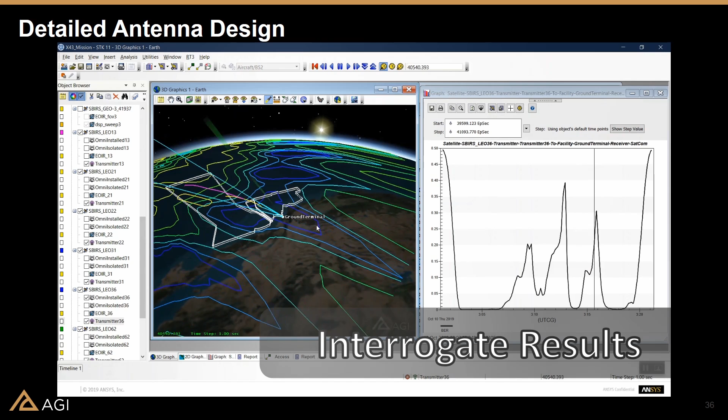This can help us once again paint a better picture for how to mitigate these issues and deal with any types of initially unforeseen problems that we could not detect with just using the coarse antenna.

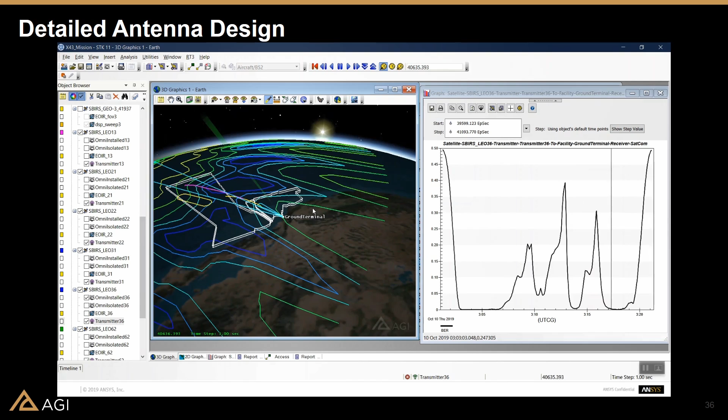So once again, all of this ties back to my mission. With the proper antenna design, proper thermal design, proper CFD modeling of the aircraft, thermal characteristics, and communications platforms, am I still able to guarantee myself a mission success? This is where you would be able to go through that whole process. All of these things need to play in with each other.

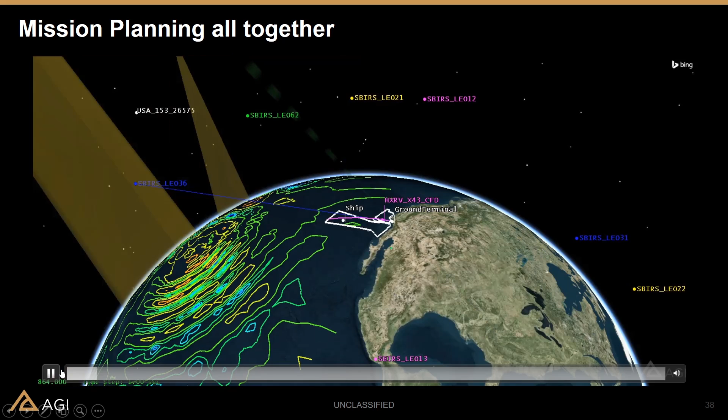So as we have our X-43 hypersonic vehicle taking off, we need to have our EOIR sensors properly transferring or going through their analysis at the same time as having all the communications layers and satellite orbits playing with one another. We need to model the entire operational environment, like we see here on screen, to truthfully ensure that we're able to deliver accurate results in a seamless single environment.

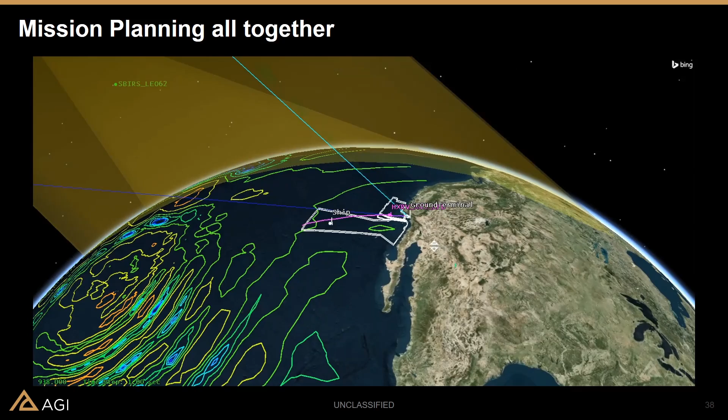And now you can probably picture also with what we see here that what users would have learned using STK with all these different portions of the aviator, EOIR communications, could then be applied to other programs that also involve aircraft, thermal analyses, or even communications analyses.

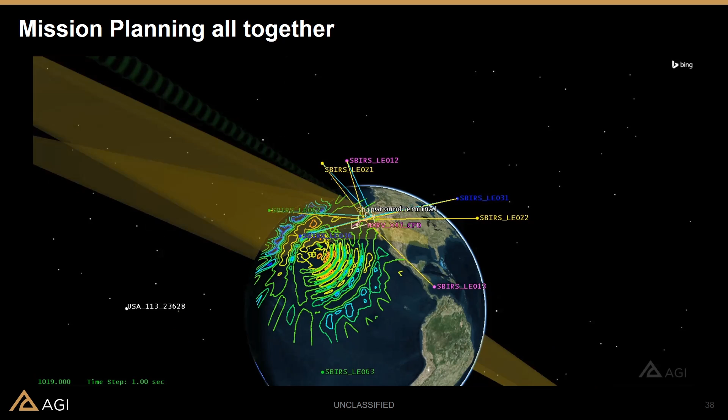So we're really just showing the different facets of DME right here by showing that we're able to bring in various models that are either user-defined or user-calculated from external tools and leverage them together with what our multi-domain physics-based environment has to offer.

So the biggest takeaway to remember is you need to target an ecosystem that connects the different mission, system, subsystem, and component models that link back to a multi-domain physics environment. That is the single most important thing. We can't just focus on the disparate pieces and models in each of these different portions, like testing or training. We want it all to link back together to make sure that we're focused on the mission.

And although the Digital Engineering Initiative is still fairly new, AGI has spent the last 30 years developing STK. As we saw, STK does allow us to model different open, data-driven models, such as performance models of aircraft, sensor models, communication models, and various threat models, as well as integrate with various other tools. We know there's going to be many tools where other high-level analysis is being done, such as ANSYS in our use case, or even Excel or MATLAB, that need to be brought in. So STK has the ability to really scale up and open itself to various applications. We do believe that because of this, STK has a large role in the DME and MBSE realms of both the aerospace and defense industry.